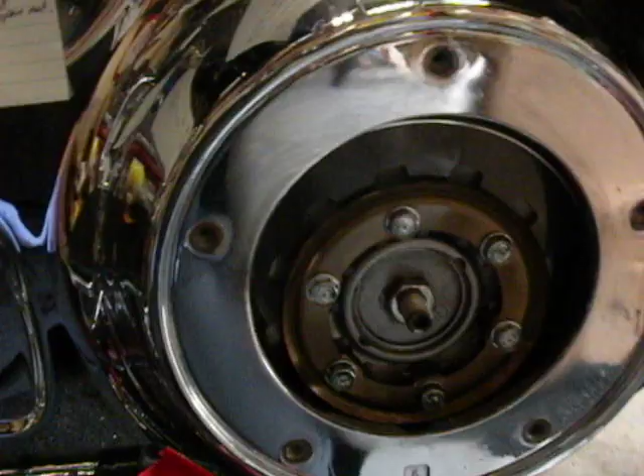Okay, today we're going to do a clutch adjustment, actually a complete clutch adjustment from the clutch assembly, which is right here, and finish off with the cable adjustment for the free play adjustment.

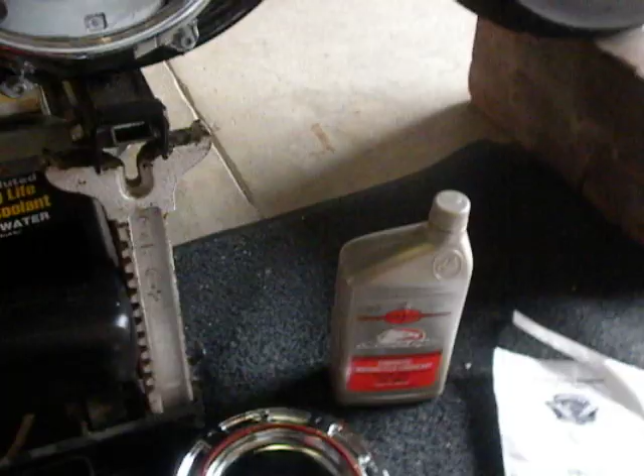First thing I would suggest doing is getting a Harley Davidson factory service manual, or you can get an aftermarket manual, but one way or the other, it'd be a very good idea to get the proper manual to do any type of servicing on your motorcycle.

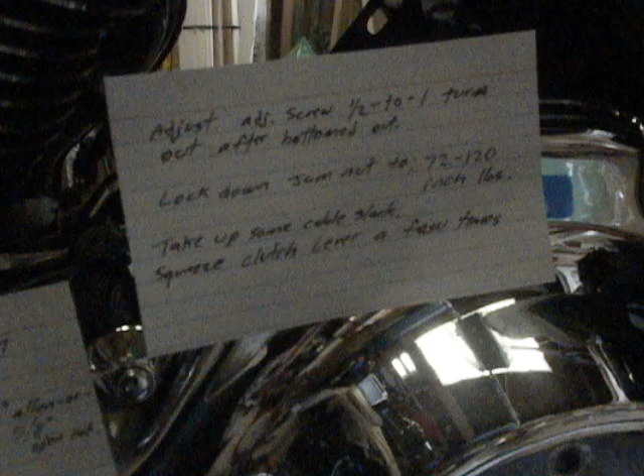With that said, what I've done is gone to the clutch adjustment section, and I've actually rewritten some of the information that I'm going to need as I do this procedure. This just makes it a little bit easier when you're doing the adjustment, so you don't have to keep flipping back through the pages, and at the same time you don't end up getting the book all greased up.

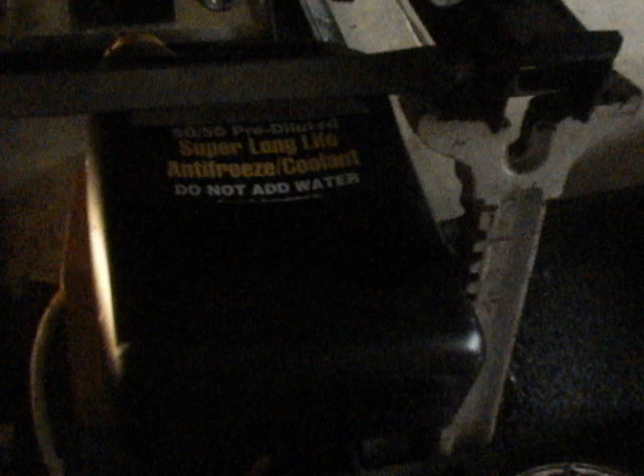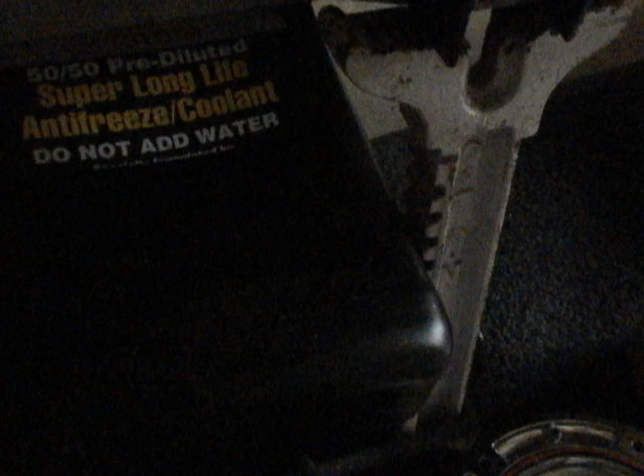Okay, I've started this procedure by draining the primary oil, and basically all I've done is taken a used coolant bottle, wiped it out, and cut open a portion of the side of it with a utility knife, kind of hard to see, and use that as a little drain pan. For me, it fits in between the lift and makes it a lot easier to deal with.

Okay. First thing that you want to do is go to your clutch cable. Hard to see here because it's all black. But what you want to do is back the adjustment off. Basically you're putting in all the free play possible. You're going to give it slack, loosen that up, back it off. The lever, you'll feel it in the lever. The lever will move very easily.

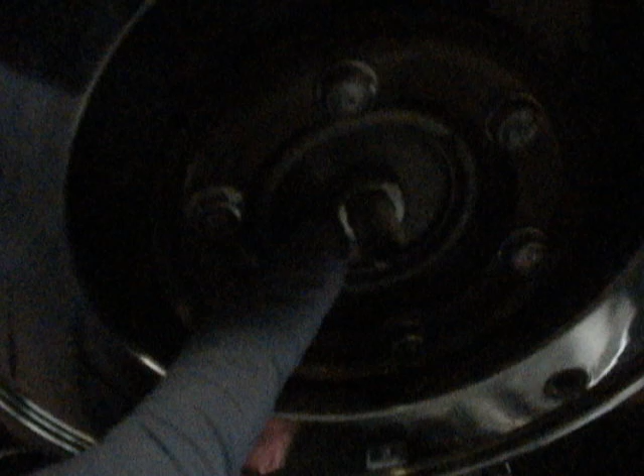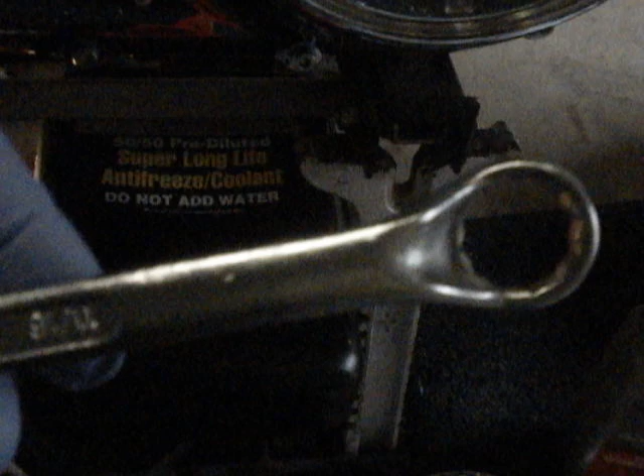After you've done that, you can come over here, and this jam nut, you're going to loosen that jam nut. Probably be better if the bike was either on the ground or you had it in gear. I have the bike on the lift, and it's probably in second or third gear. You're going to loosen that with an 11/16 wrench; a box offset wrench would probably help. You might want to put a towel here so you don't scratch the finish on the primary cover. And you're going to back that nut off.

Once you back that nut off, you want to get an Allen key, or in this case I have a T-handle. It's a 7/32 Allen. You're going to turn this screw until it bottoms. When I say bottoms, you're going to turn it very gently until it stops. You might want to do it a couple times so you get the feel of it.

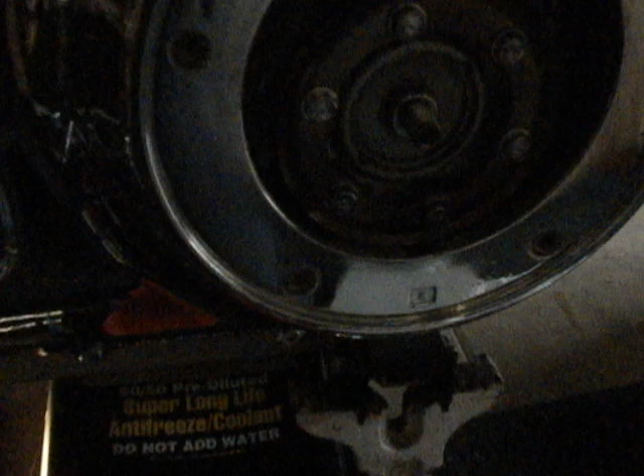Once it stops, what I do is I get some whiteout, liquid paper, something of that nature. Try not to use the whiteout pens. A lot of times they don't get the mark on there that well. I've actually adjusted this already, but what I do is I stick a dot of that whiteout at a 12 o'clock position. Once you've loosened the jam nut and turned this screw all the way until it bottoms, that's where I put the whiteout dot. That's my reference point for where it's bottomed.

Then you want to use your Allen key and turn this screw out approximately a half to one full turn. Once you've done that, you want to lock the jam nut down to 72 to 120 inch pounds. So you're talking about 6 to maybe 10 foot-pounds. You can pretty much feel that by hand. So you're going to lock that down.

Then you're going to go back to the clutch cable side, and you're going to adjust that, I call it a turnbuckle, threaded sleeve, what have you, to take the slack out of the cable. Once you rotate this and take some of the slack out, when you're squeezing the lever, it'll feel like it should. It'll have tension to it.

You'll know if everything is doing what it's supposed to be doing, because one, it'll feel correct, and two, if you look at the center of the clutch, you can see that the diaphragm is depressing the clutch plates. You kind of see that moving, right? And that's pretty much it.

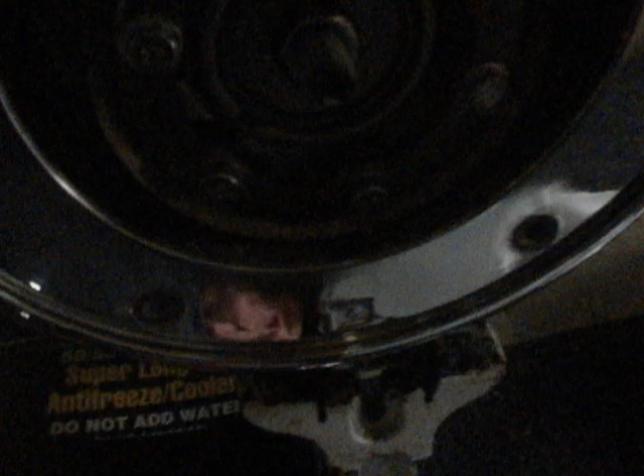At this point, you want to fill your primary oil up, and you can refer to your service manual for the picture, but basically, I have a little flexible light here. You're going to fill that oil right up to that edge. There's a specific primary oil you want to use. The service manual tells you what the dealer recommends, or you can use Harley Davidson's Syn 3, which is a full synthetic oil.

My personal preference is I use the Syn 3 in all of the cavities: the primary, motor oil, as well as the transmission. Been using it for 10,000 miles plus and have had no problems with it. It's a little pricey, but I think in the long run it's worth it. So we're going to go ahead and proceed to fill the oil.